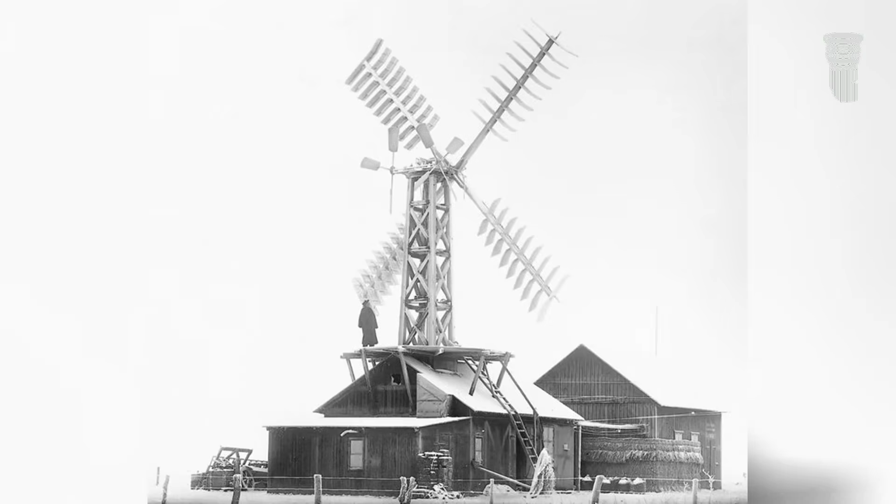Anyone with a water wheel or windmill could compress air and fill tanks themselves. This meant access to virtually free fuel, independence from supply chains, and the impossibility of creating an artificial shortage for profit. Such independence posed a direct threat to those who were building their financial empires on coal and oil at that time.

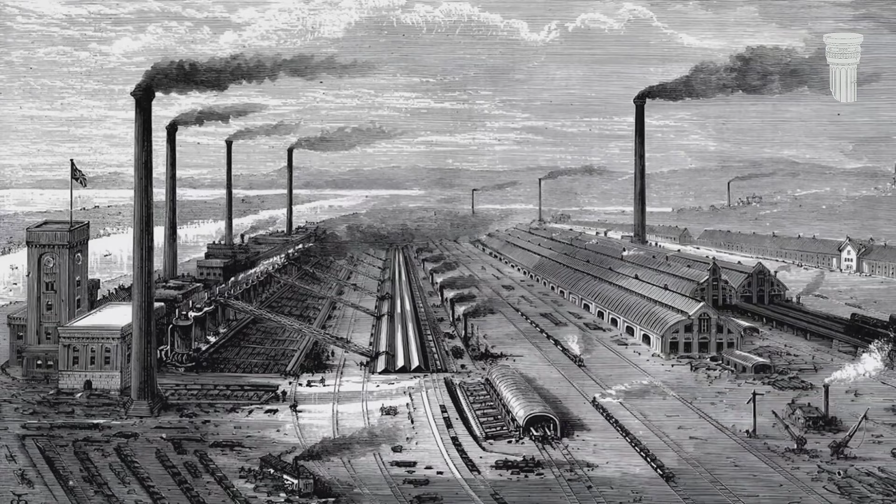The story of the pneumatic age, which almost came to be, is one of a technology that worked too well. In the 1870s, cities could have been cleaner than modern metropolises, yet there was a deliberate shift from energy freedom to dependence, which we were taught to call progress.

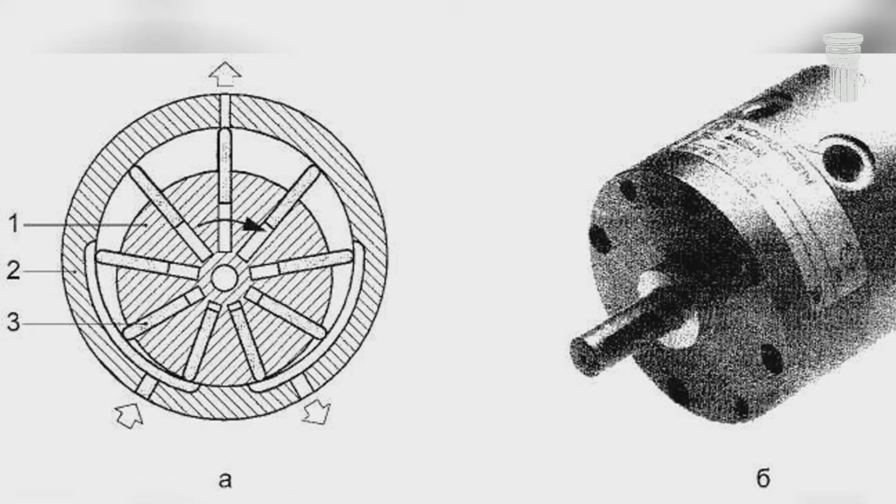Pneumatic trams were not a theoretical concept. They represented a fully functioning infrastructure. A key figure in this narrative was the Polish-French engineer Louis Mekarski, who secured his patent in 1876. His brilliance lay in solving a fundamental physical problem that had stumped all previous creators of pneumatic engines.

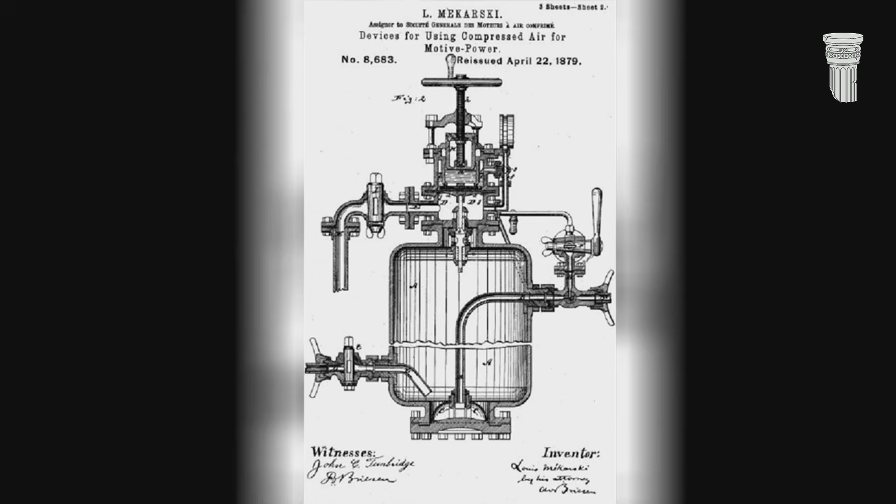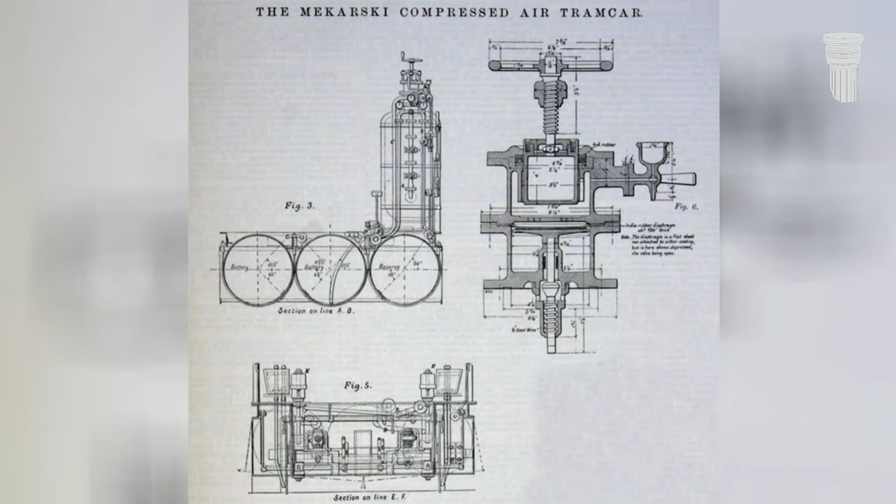This was the thermodynamic cooling effect during expansion. The laws of physics are unforgiving. When compressed air instantly transitions from a high-pressure zone to a low-pressure one, it expands rapidly, causing an extreme drop in temperature. In early models, this resulted in engines literally freezing from the inside. Valves would freeze, pistons would jam, and the machine would break down.

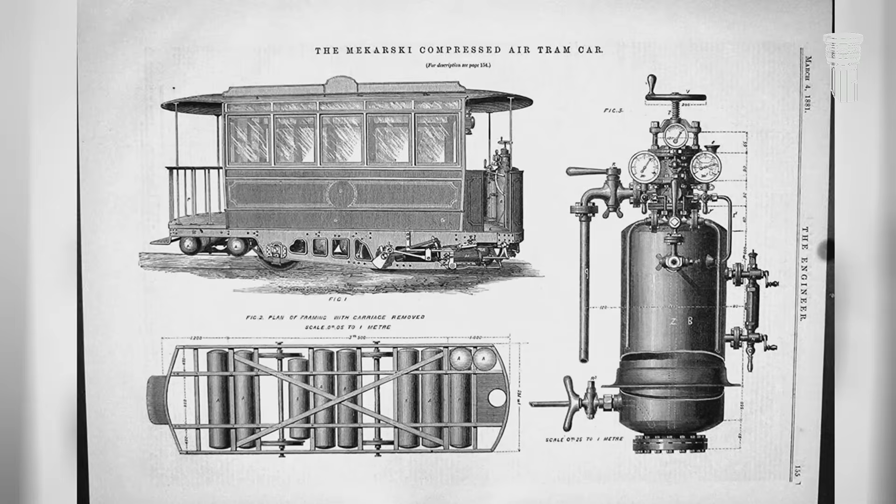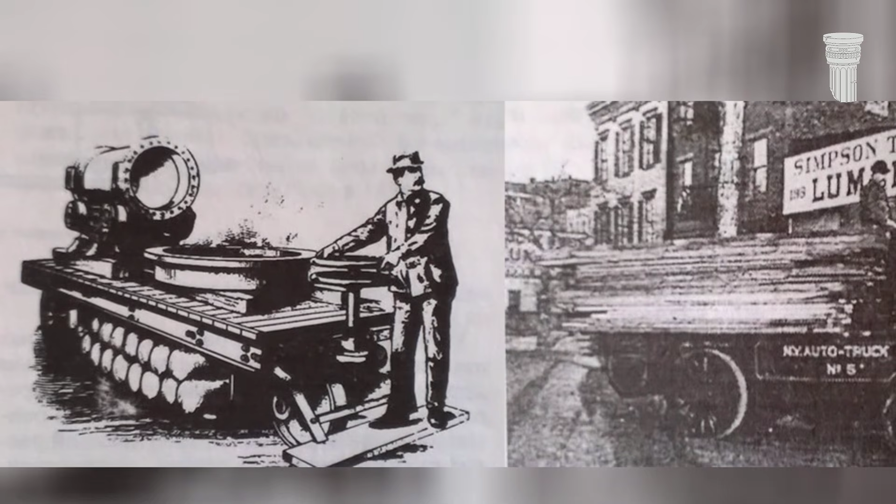Engines failed not due to a lack of power, but because the mechanisms couldn't withstand the icing. Mekarski found an elegant solution by introducing a system he called bouillotte, a built-in tank with heated water integrated into the air supply mechanism. In this system, compressed air from the tanks passed through hot water before entering the engine cylinders. The water transferred heat to the expanding air, preventing icing and maintaining stable pressure throughout the operational cycle. This was a technically perfect solution based on a profound understanding of thermodynamics.

The tanks on the trams stored air at a pressure of about 75 atmospheres, while the heating system kept the water temperature around 90 degrees Celsius. The oil costs for heating were negligible compared to the amount of coal consumed by the steam engines of that era. The results were impressive.

The vehicles could reach speeds of up to 30 kilometers per hour and had a range of 10 to 15 kilometers between refuels. Throughout the city, specialized compressor stations were set up where trams could quickly replenish their energy supplies. The capacity of the carriages rivaled that of horse-drawn carriages, but operational costs were significantly lower.

The Compagnie Générale des Omnibus successfully operated this pneumatic fleet for 41 years, daily transporting thousands of workers and tons of goods across numerous routes. Yet, in 1917, it all came to an end. The technology was scrapped and the infrastructure dismantled.

Officially, this was termed modernization and a transition to electricity. But it was during this period that oil began to seize global dominance, and the transportation system started transforming into a tool for global control.

Are you ready to discover how a similar technology secretly developed beneath the streets of New York and why its creator had to become a master of espionage to challenge a corrupt system?

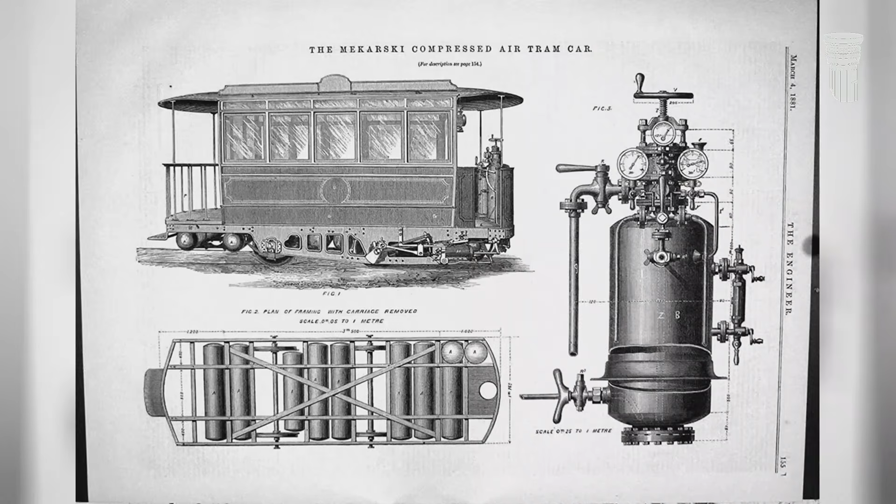Despite the success in Paris, the journey toward perfecting the pneumatic engine was obstructed by the harsh laws of nature. When Louis Mekarski, a French-Polish engineer, began his project in 1876, he encountered a challenge that had previously made the use of compressed air in transportation nearly impossible. It was a thermodynamic paradox.

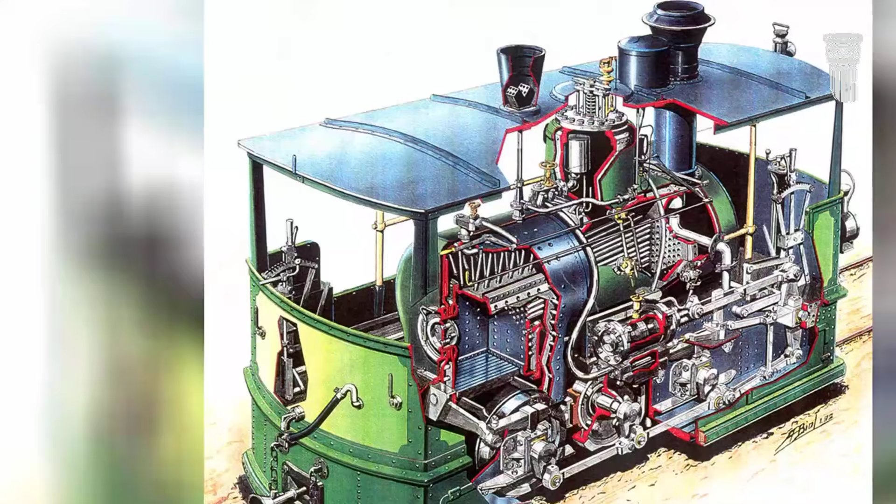Once air is released from a high-pressure zone into a low-pressure area to perform mechanical work, it expands rapidly, resulting in a sharp drop in temperature. This physical process turned the early pneumatic motors into genuine ice generators.

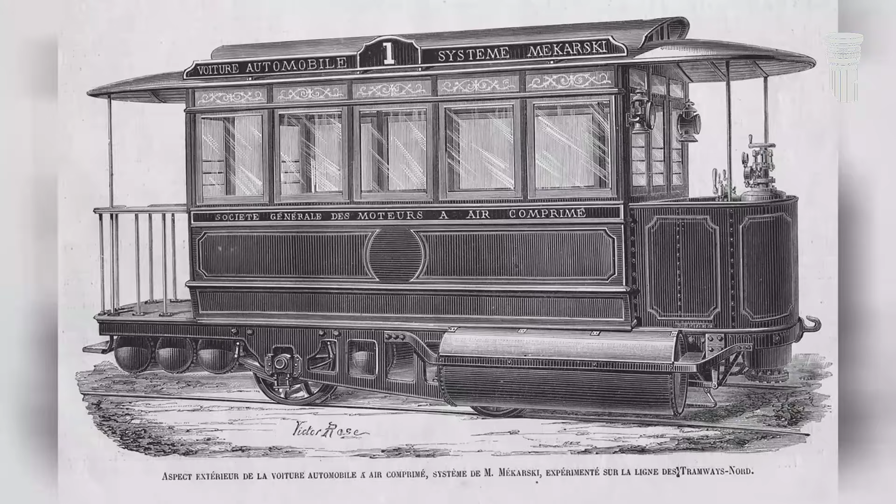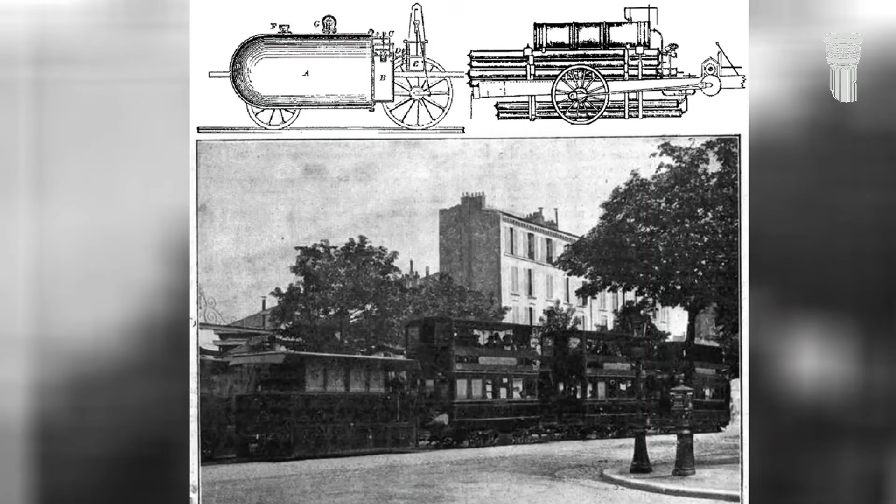Internal mechanisms would become covered in frost, valves would freeze solid, and pistons would jam in their cylinders. Engines failed not due to design flaws or lack of power, but because the metal couldn't withstand the Arctic cold generated within the system. For the technology to become commercially viable, the engineer needed to find a way to trick the physics of gas expansion.

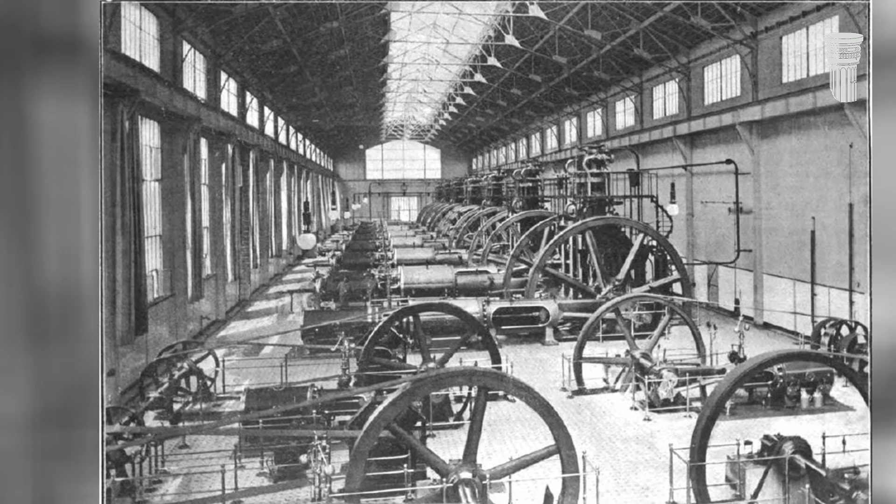Mekarski's solution was both simple and brilliant, known as the bouillotte system. He integrated a special tank filled with hot water through which compressed air passed before entering the engine cylinders. As it flowed through this thermal bath, the air became saturated with heat and water vapor.

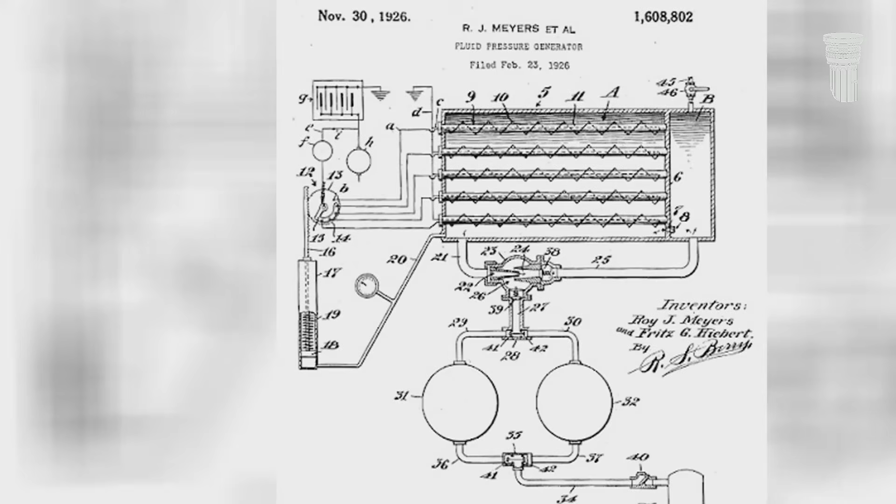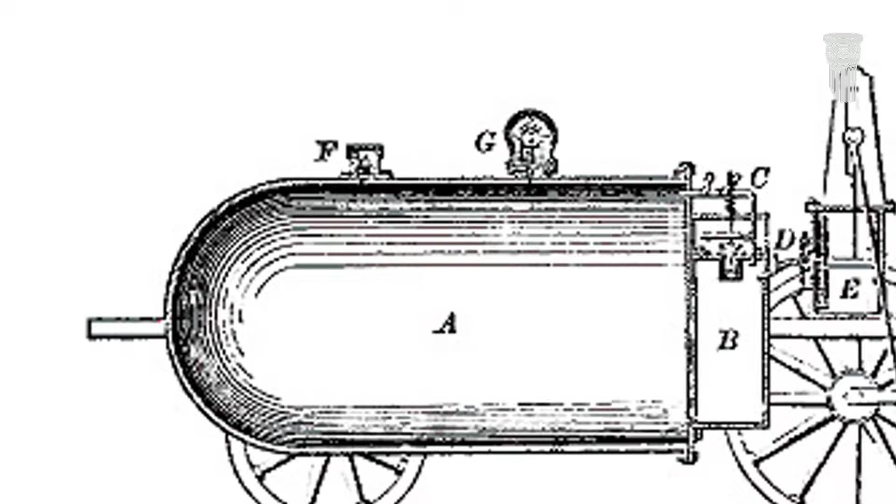This not only completely prevented the mechanisms from freezing, but also allowed for stable pressure and temperature throughout the entire working cycle. The technical drawings from that era demonstrate a profound understanding of thermodynamics.

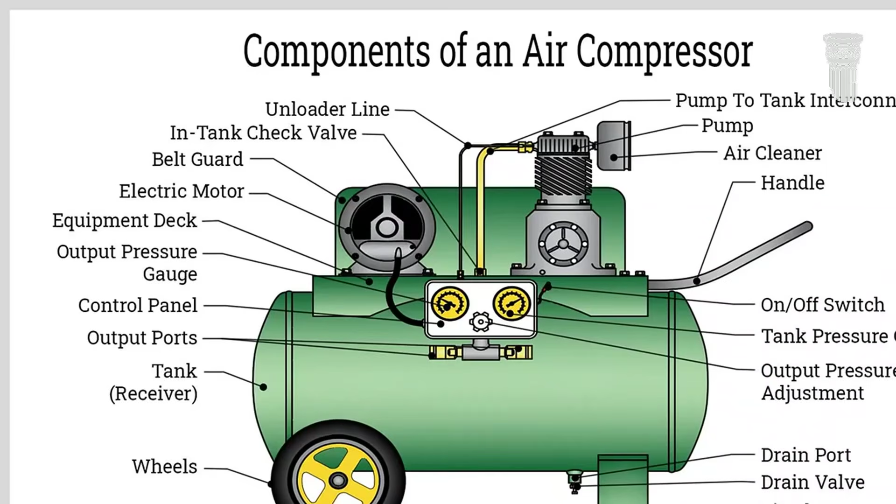Air was stored in tanks under a colossal pressure of 75 atmospheres, while the water in the heating system was maintained at 90 degrees Celsius. Remarkably, only a tiny oil heater was used to maintain this temperature, consuming a negligible amount of fuel compared to the voracious burners of traditional steam locomotives.

This made Mekarski's pneumatic trams incredibly autonomous and inexpensive to operate. Records from the Paris Transport Company confirm that these vehicles could easily reach speeds of up to 30 kilometers per hour and had a range of 15 kilometers between refuels at urban stations.

Passengers of that time experienced a level of comfort that seemed almost fantastical. No jolting, no smoke, and no noise, while the capacity of the cars matched that of horse-drawn carriages, but without the accompanying issues of waste on the streets. The system operated successfully for 41 years, becoming an integral part of Parisian life.

However, while European engineers were proving the reliability of pneumatics in everyday use, on the other side of the ocean, in New York, an even more thrilling and secret drama was unfolding, where compressed air became a weapon in the fight against political corruption. How was a marvel of engineering constructed under the busiest avenue of Manhattan, all under the strictest secrecy, destined to forever change the face of urban life?

In February 1870, the residents of New York were confronted with an engineering marvel that, by all logical standards of the time, simply shouldn't have existed. Right beneath the bustling Broadway, a subway line was unveiled, built under the strictest secrecy and powered by compressed air.

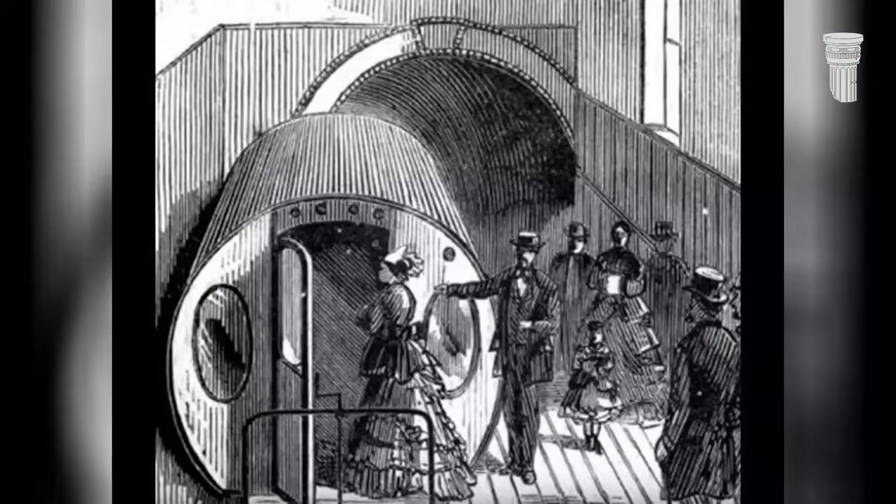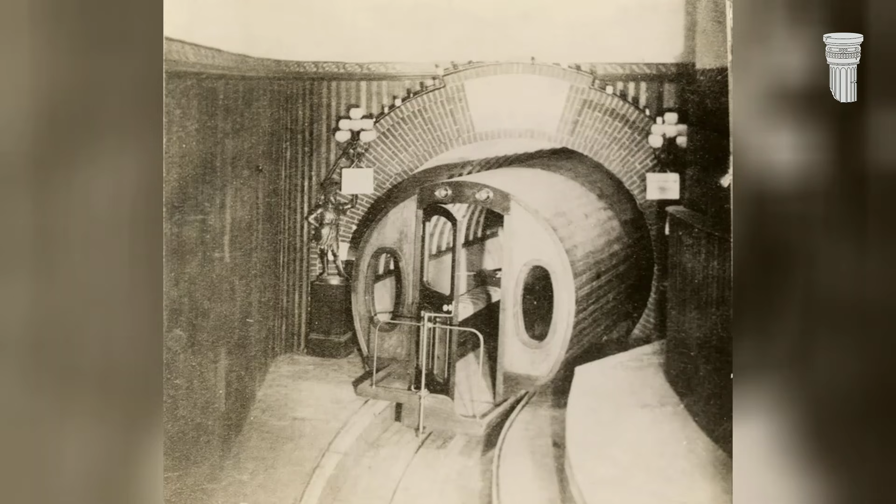The mastermind behind this ambitious project was Alfred Ely Beach, the publisher of Scientific American and a talented inventor whose story unfolded like a thrilling industrial espionage tale. Beach had proposed the concept of a pneumatic subway to the city officials back in the 1860s.

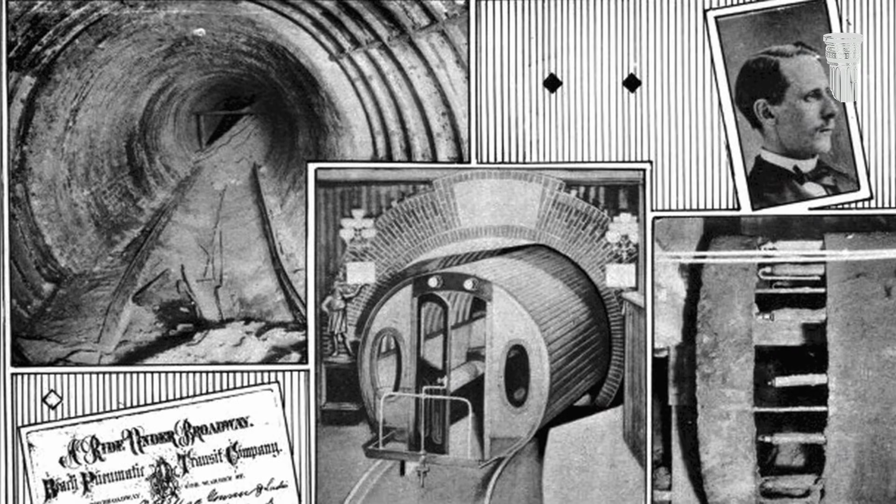The idea was technically flawless, a sealed tunnel housing a car propelled by a giant fan. The powerful airstream would literally push the vehicle along, much like a capsule in a pneumatic mail system. This setup promised to be fast, efficient, and didn't require engines on the car itself.

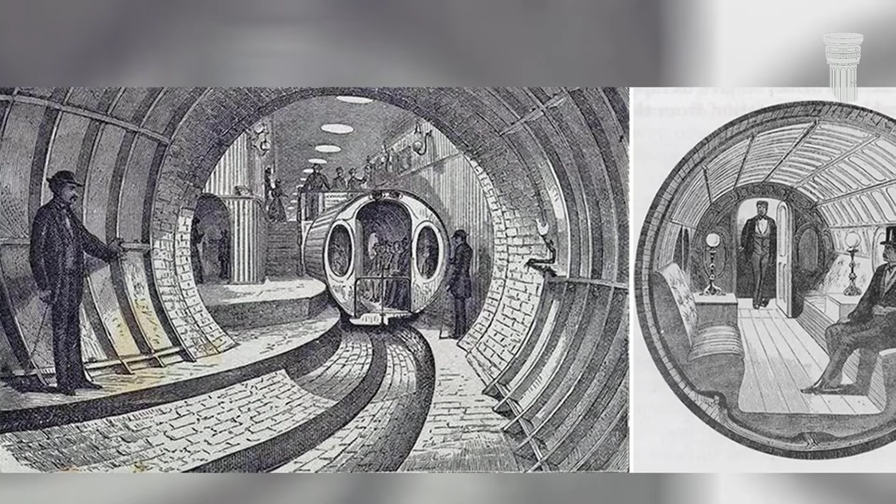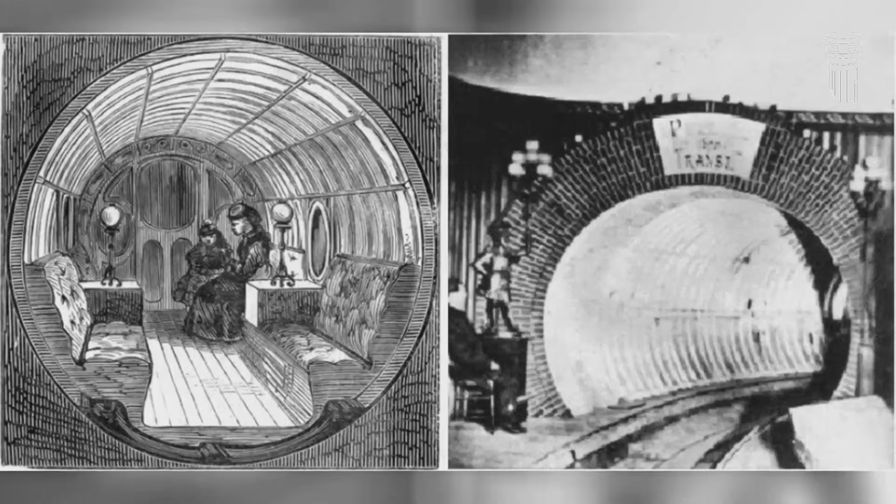However, progress was thwarted by political corruption in the form of William Marcy Tweed, known as Boss Tweed, who had complete control over the politics and transportation system of New York at the time. With significant financial interests in surface streetcar companies, Tweed blocked any attempts to create an underground transport system that could rival his business.

Realizing that obtaining permission to build the subway was impossible, Beach took an unprecedented risk. He officially requested a license to lay a small pneumatic tube for transporting mail, which didn't seem to threaten the transportation magnates. Once he secured the necessary papers, he and his team began secretive work.

Under the cover of darkness, workers manually excavated a tunnel about 3 meters in diameter and over 95 meters long, right beneath one of Manhattan's busiest avenues, illuminated only by lamplight. To avoid suspicion, tons of excavated soil were discreetly removed through the basement of an ordinary clothing store.

The result of this underground endeavor was astounding. The brick lining of the tunnel was executed with such precision that the buildings above sustained no damage whatsoever.

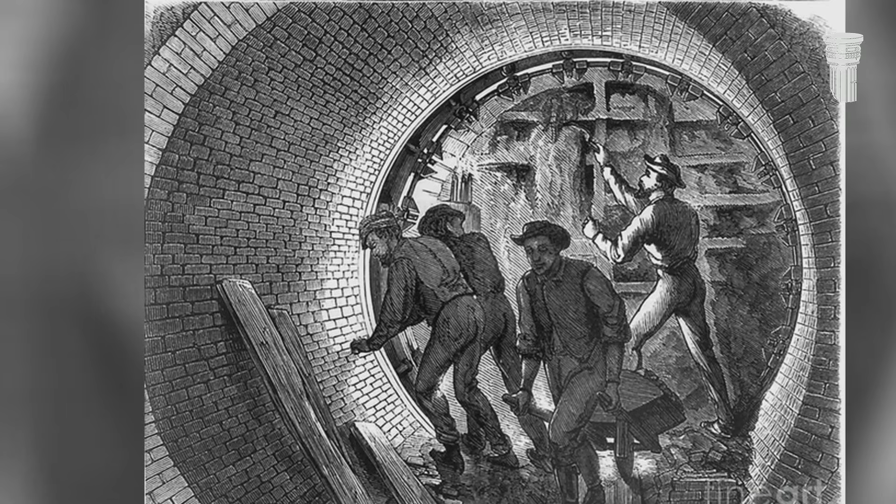At the heart of the system was a massive 50-ton fan, capable of generating enough airflow to move a 3-ton car at a speed of 16 kilometers per hour. The car itself, designed for 22 passengers, was a vision of comfort and luxury, featuring plush seats, gas lighting, and elegant windows.

When Beach finally opened the subway to the public, the reaction was ecstatic. The waiting station resembled a lavish salon more than a transport hub, walls adorned with murals, a grand piano in the room, a fountain, and even an aquarium.

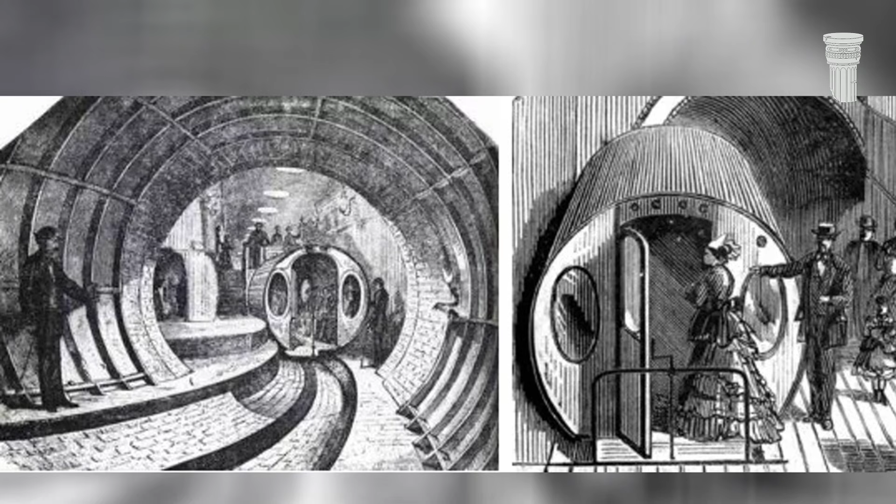This was not a crude experiment. It was a showcase of what the future of urban transport could look like. Thousands of people rode the pneumatic train, and the press dubbed the project the Subway of the Future.

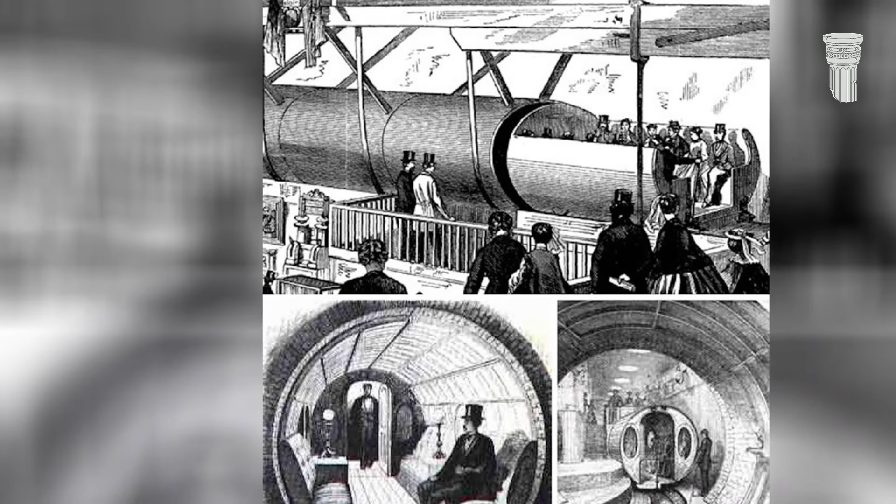Beach was poised to expand the network throughout Manhattan and had already found investors for his $5 million plan. But this engineering triumph faced the harsh reality of political influence, which turned this success into a forgotten chapter of history.

How did New York's political machine manage to dismantle a project that had already proven its viability? And why did the citizens have to pay the price of decades of waiting for this victory of private interests? Do you want to continue and discover how Boss Tweed put an end to the pristine future of the metropolis?

Alfred Beach's triumph was short-lived, as he encountered a force that could not be defeated by engineering calculations alone. In late 19th century New York, real power belonged not to the law, but to the political machine known as Tammany Hall, led by William Tweed. For Tweed, the boss, and his associates, any public project was viewed solely as a means for personal enrichment.

Beach's pneumatic subway was too transparent, too autonomous, and, most importantly, it did not allow Tweed to control the financial flows he had already distributed among his allies in surface transportation. Using his colossal influence, Tweed managed to convince the state governor to veto Beach's bill for expanding the underground network. The official reason cited was concern for the safety of building foundations, but in reality, it was a political execution of a promising technology. When Tweed himself found himself at the center of a corruption scandal and lost power, Beach's project was not given a second chance.

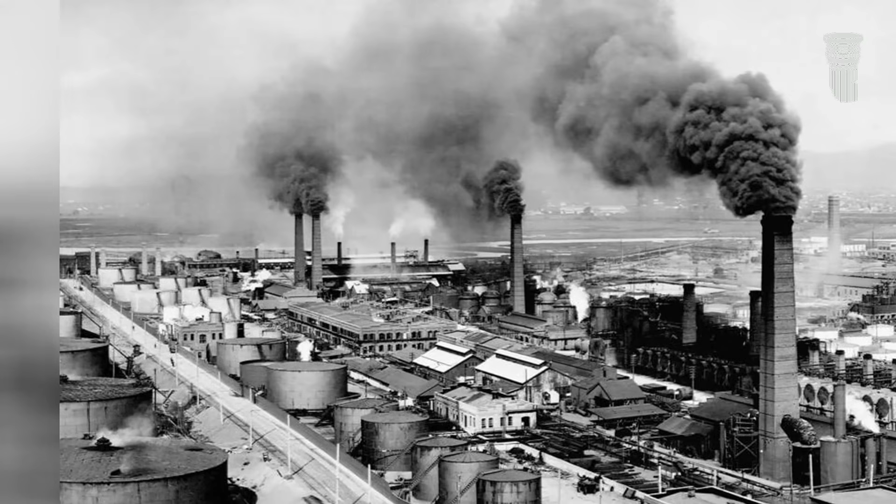However, beneath the local political intrigues of New York lay a more significant process at play. The end of the 19th century and the beginning of the 20th marked an era of forming global energy monopolies. John Rockefeller and other oil magnates were building an empire where every mile traveled had to be paid for by purchasing fossil fuels. Compressed air, which could be obtained almost for free through the power of wind or falling water, posed an existential threat to this model.

This is why the year 1917 became a symbolic date, marking the definitive decline of pneumatic transport in major cities. While the world was consumed by global conflicts, a quiet modernization occurred. Eco-friendly and durable systems were replaced with those that required constant fuel purchases or complex centralized electricity generation. Pneumatics did not lose in efficiency. It lost in its ability to generate enormous profits for a select few.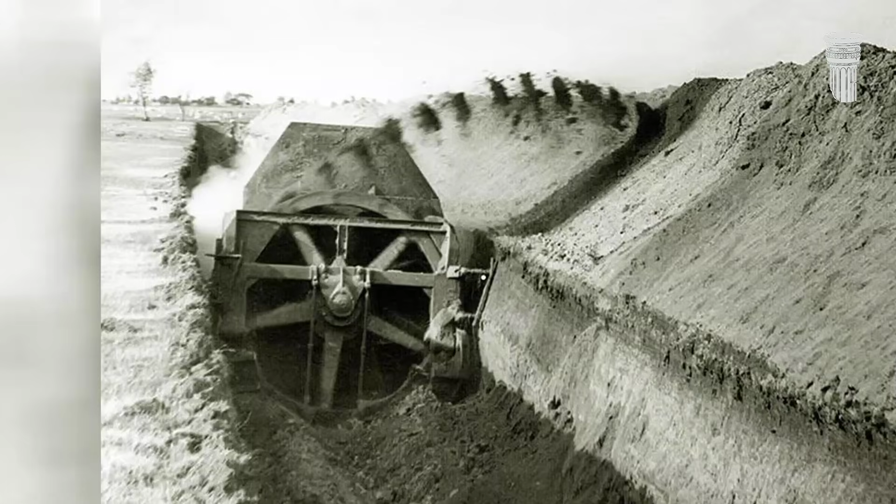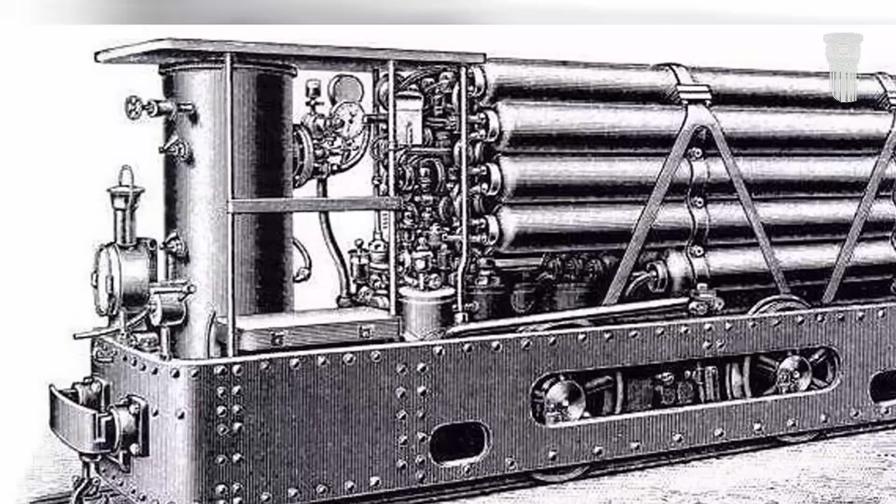Yet, even as cities officially turned away from air in favor of gasoline, this technology did not vanish entirely. It retreated to places where the use of internal combustion engines was perilous, and reliability was valued above marketing slogans. Pneumatics found its last refuge deep underground and in secret communication systems, becoming the invisible backbone of the industrial world. How did compressed air continue to serve humanity in the complete darkness of mines, and how did entire metropolises operate for decades through a physical internet hidden within pipes?

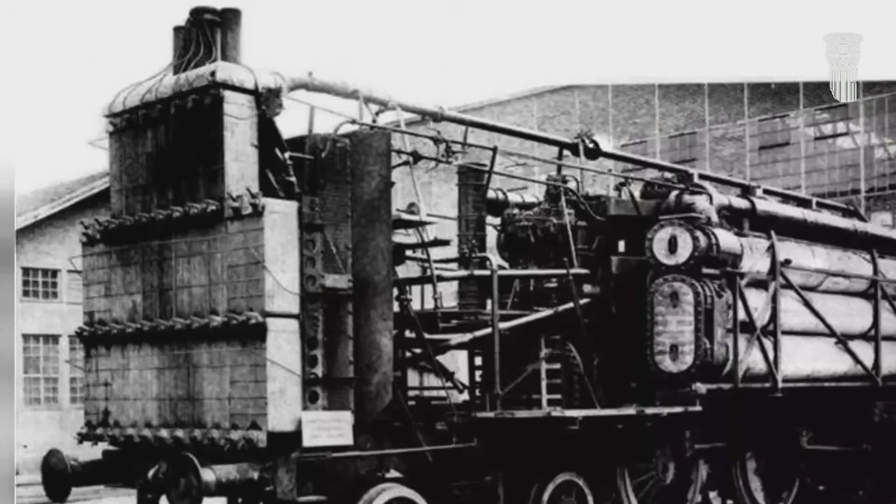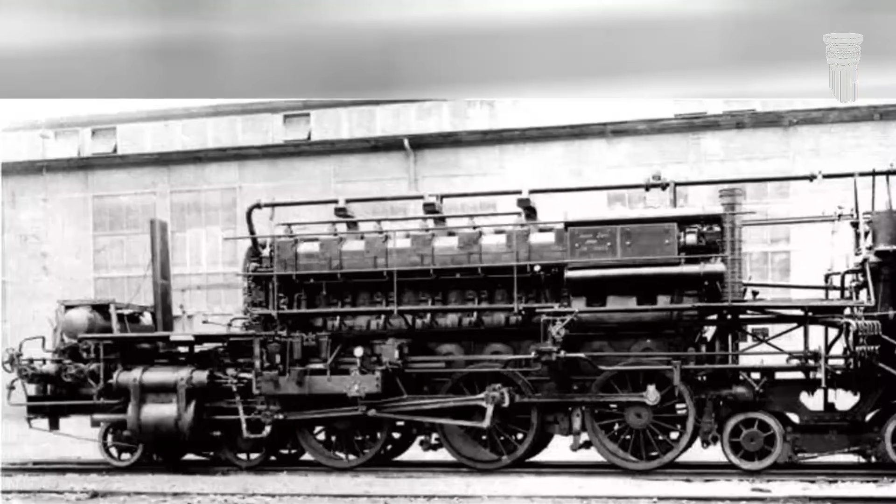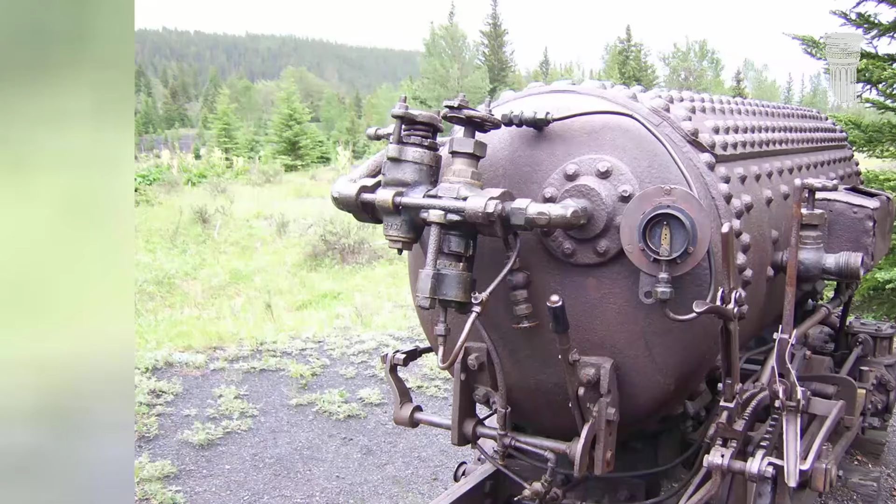When ground transportation was ultimately taken over by oil corporations, compressed air found refuge in the harshest conditions, where human survival literally depended on the purity of energy. Mines and deep tunnels became the last bastions of pneumatics. In the confined spaces of the underground, the use of steam engines was impossible due to suffocating smoke, while early internal combustion engines posed a deadly explosion risk from the slightest spark igniting mining gas.

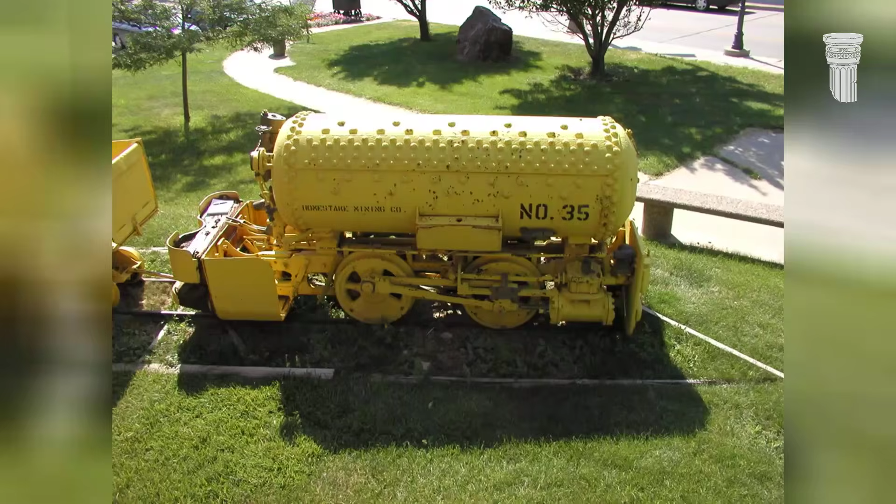In this environment, pneumatic locomotives proved to be the ideal workers. They not only consumed no oxygen, but in fact expelled fresh, cool air with every engine cycle, improving ventilation for the workers. These powerful machines could pull trains weighing up to 100 tons, operating in complete darkness and dampness for decades. In some European and American mines, such systems remained the primary mode of transport until the mid-1950s, demonstrating that in extreme conditions, reliability and safety outweigh marketing advantages.

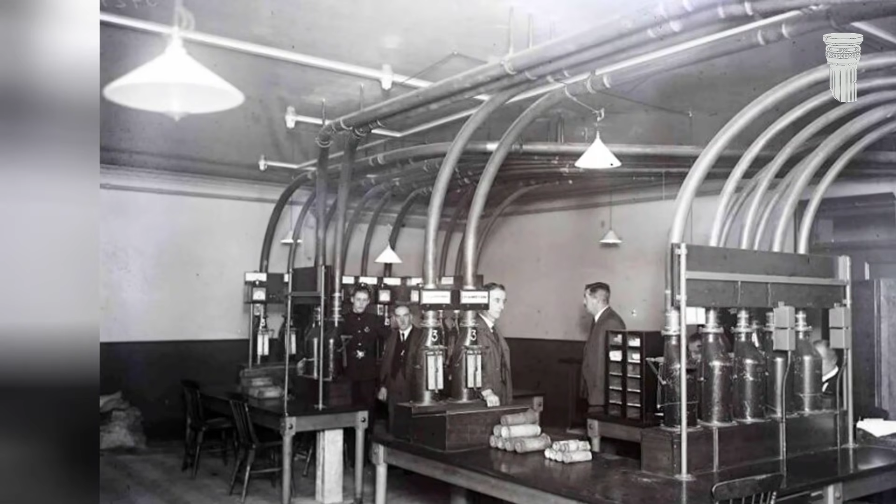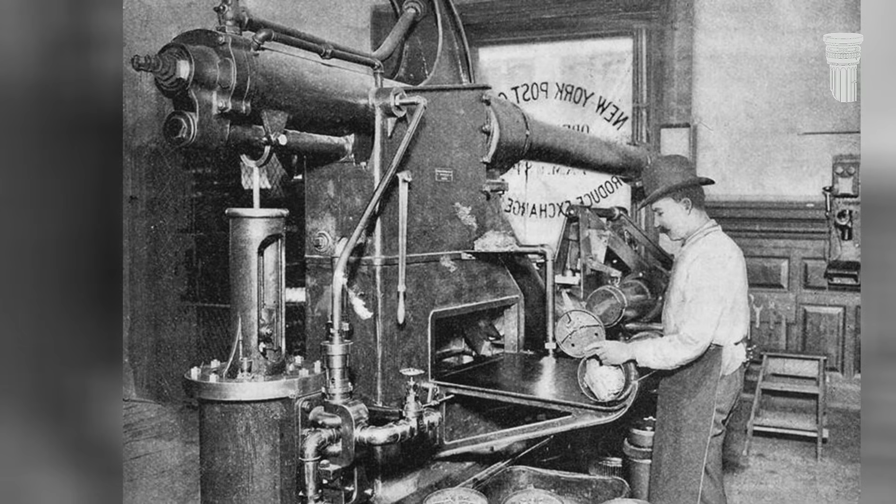However, the most monumental testament to this technology was the pneumatic network of Paris. While engines roared above ground, a true physical internet sprawled beneath the streets of the French capital. By the 1930s, the length of this piping system reached a staggering 400 kilometers. It was a complex infrastructure that connected post offices, government buildings, and banks. Capsules carrying documents and letters moved through the city at a speed that seems incredible today. Correspondence could cross the metropolis in mere minutes, oblivious to traffic jams or weather conditions.

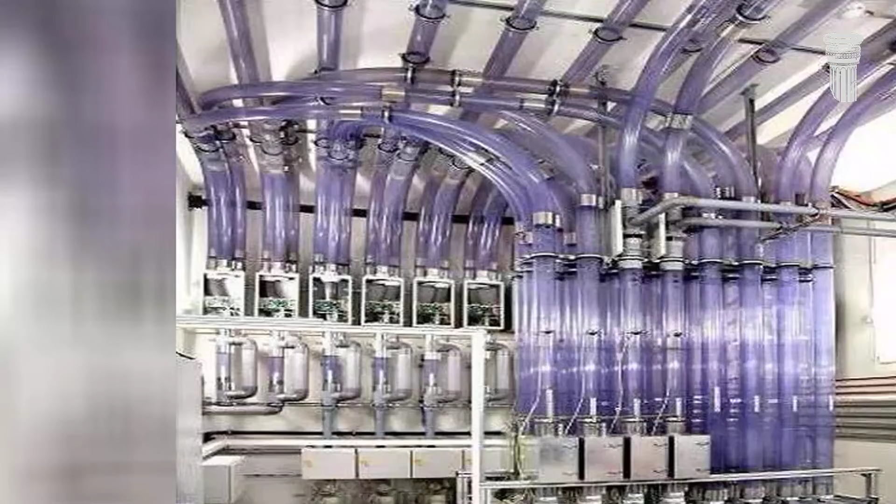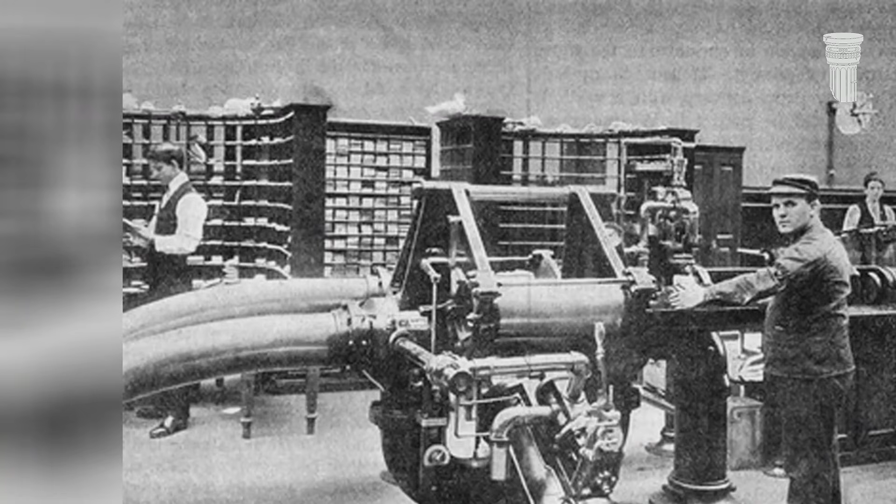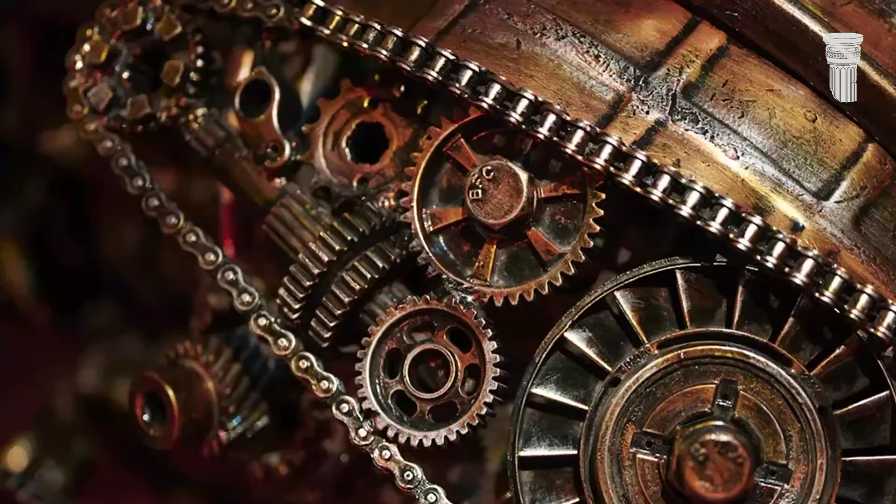The Paris pneumatic postal system was so efficient that it remained in operation until 1984. For over a century, the city relied on pressurized energy that worked silently and unobtrusively. This network was a prototype of instant communication, realized in metal and air. But Paris was not alone. Similar systems operated in London, Berlin, New York, and Prague. It was a living demonstration of how pneumatics could sustain the vitality of an entire metropolis for a century without a single gram of fossil fuel directly in consumer engines.

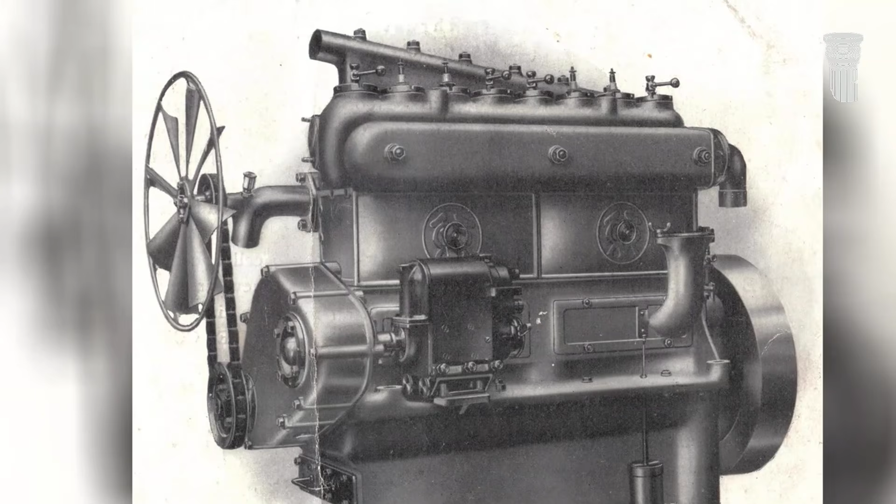But if the technology was so durable, lasting over 100 years without a fundamental change in concept, why do we not see its continuation today? The answer lies in the conflict between engineering excellence and the economic model of consumption. How did the world choose the path of mechanisms intentionally designed to fail, and why did durability become the main enemy of profit?

This will be explored in the next part of our investigation. Next, we will delve into how the strategy of planned obsolescence and Rockefeller's economic mathematics displaced transportation capable of serving generations.

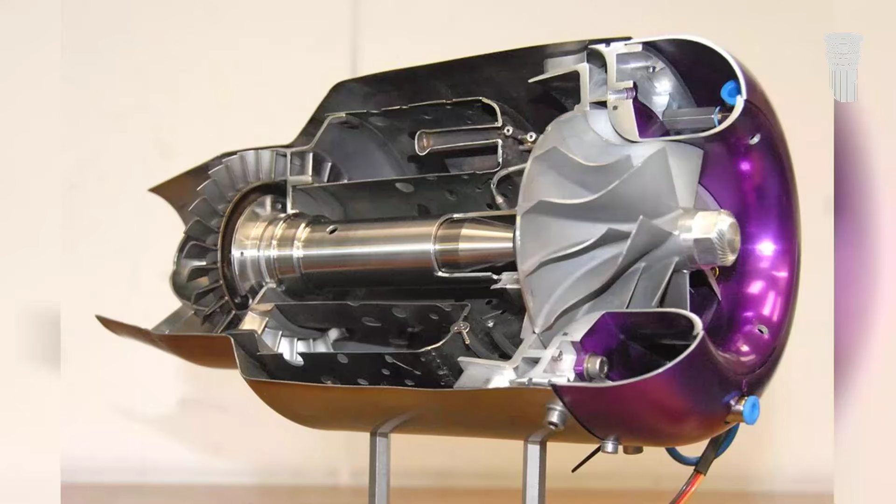The main reason pneumatic transport has not survived to this day lies in a fundamental conflict between engineering quality and economic benefit. Pneumatic engines had a characteristic that seems unimaginable for manufacturers today.

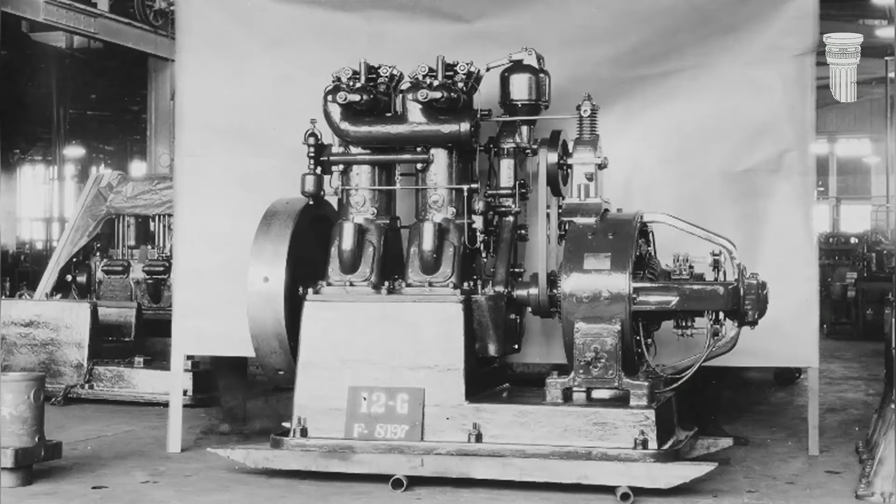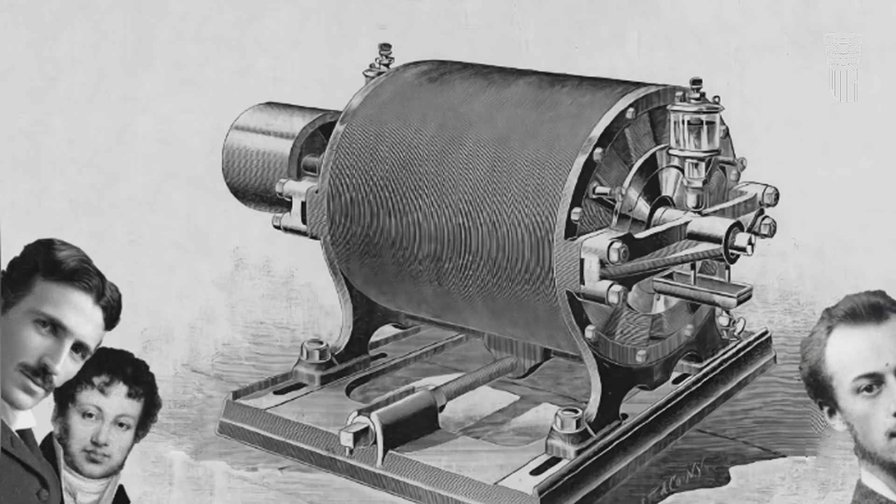They were virtually eternal. Unlike internal combustion engines, where thousands of micro-explosions destroy metal every minute, causing friction, soot, and overheating, a pneumatic piston operates in a cold and clean environment. The wear and tear on components in such a system is minimal.

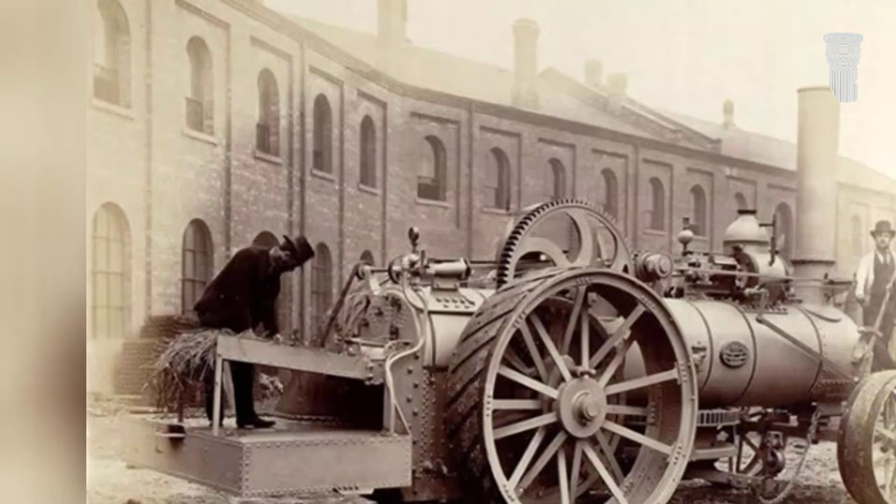Archives contain data on locomotives that served for 50 years without major repairs, requiring only regular lubrication.

For the burgeoning industrial economy of the early 20th century, such durability was a sentence. If you sell a machine that lasts half a century, your market saturates too quickly.

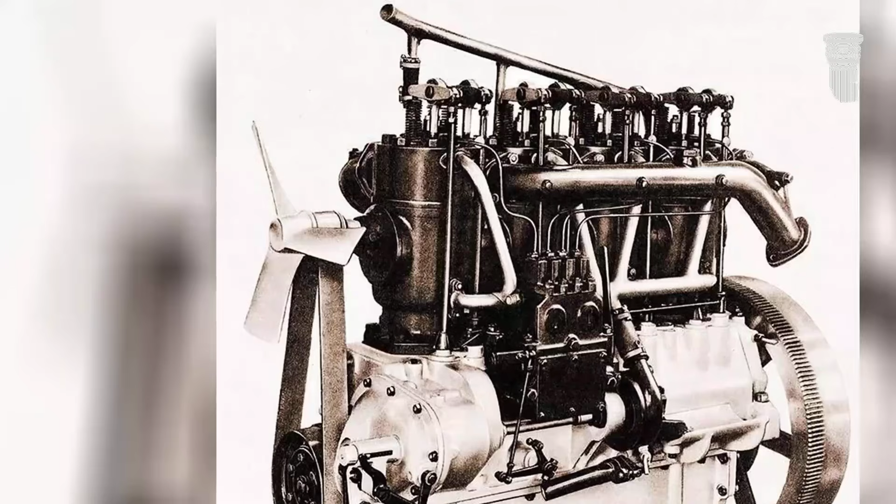It was during this time that the concept of planned obsolescence began to take shape. The business model crafted by oil magnates like Rockefeller involved not just selling a vehicle, but creating an endless cycle of consumption.

Internal combustion engines fit perfectly into this scheme. They are complex, require frequent servicing, the replacement of numerous consumables, and most importantly, tie the owner to the fuel pump.

The myth of energy density, often used to discredit compressed air, was a convenient tool for lobbyists. It was claimed that air takes up too much space and provides too little energy.

However, in practice, Paris trams and mining haul trucks proved the opposite. For urban needs and heavy freight transport, this power was more than sufficient.

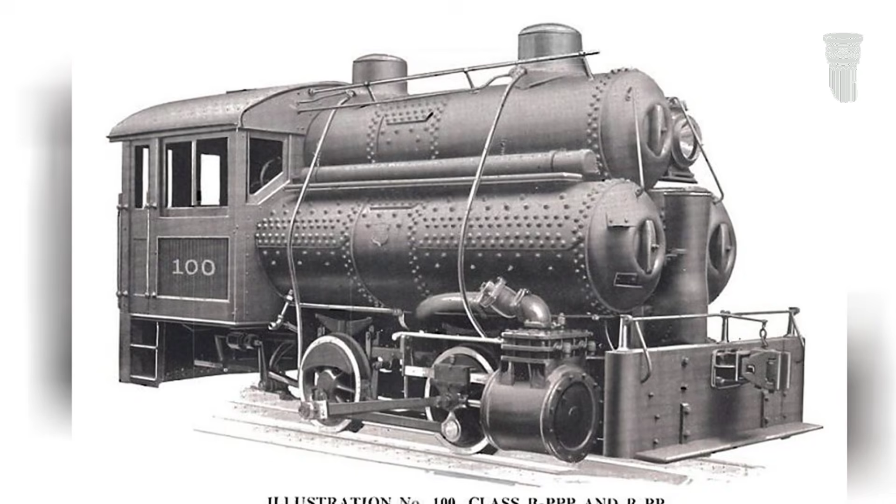The real issue lay in decentralization. Compressed air is a democratic energy source. It cannot be cut off by a valve on the other side of the continent or burdened with exorbitant extraction taxes if you have access to any source of mechanical power.

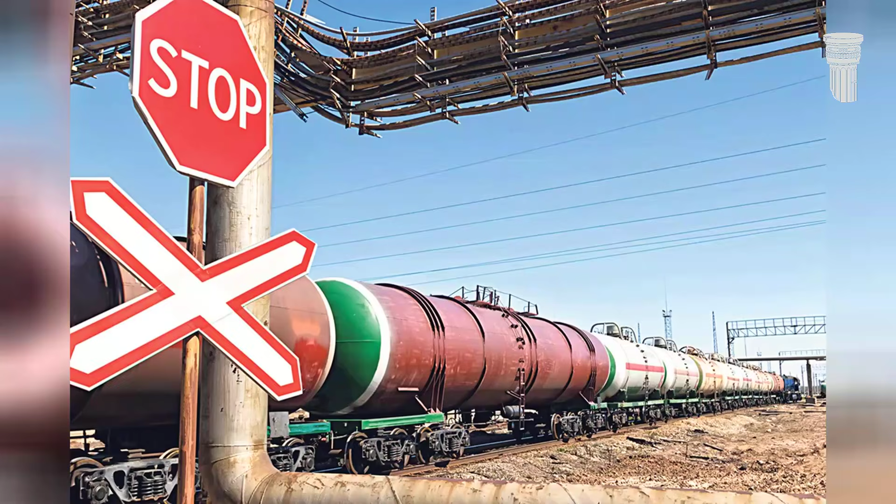As a result, the world underwent a great substitution. We traded independence and tranquility for speed and complexity. Regression was neatly packaged in the guise of progress.

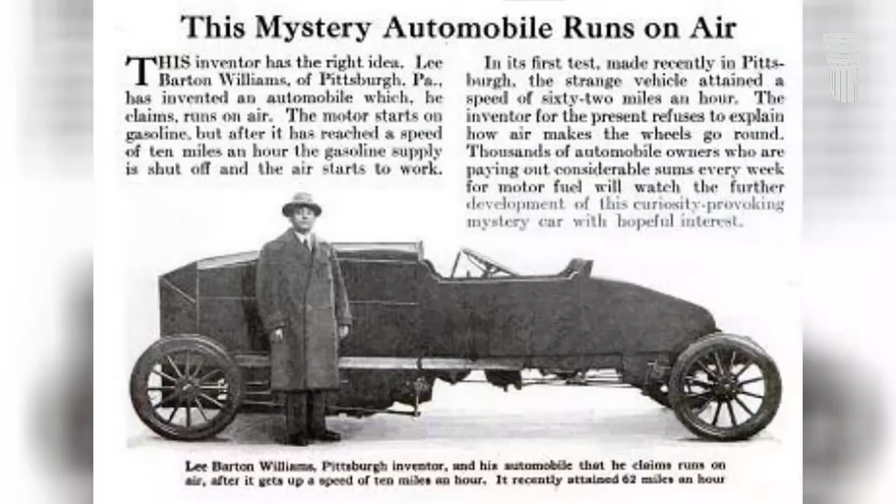Instead of improving air storage systems, investments were directed towards complicating gasoline systems. By the mid-20th century, the very memory of the possibility of an alternative path was nearly erased from the textbooks of history and engineering.

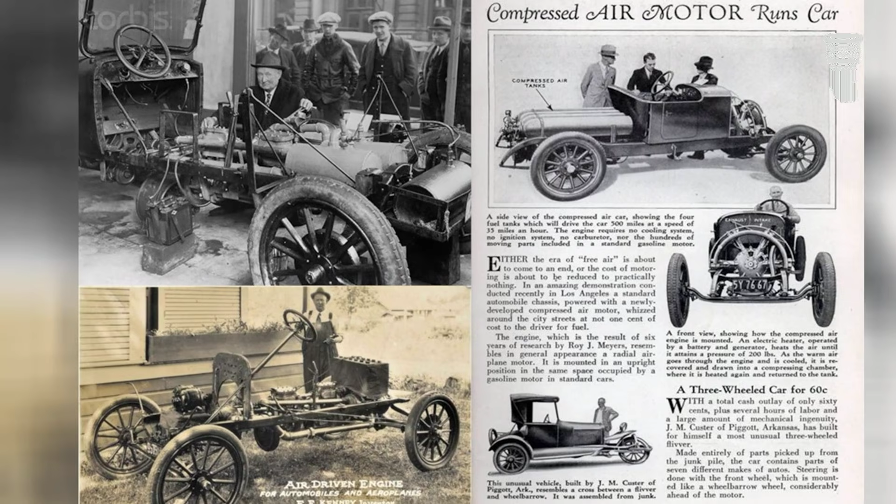Most astonishingly, decades before this conclusion, one of humanity's most visionary minds had already foreseen this scenario. His manuscript, predicting the triumph and subsequent oblivion of a pneumatic future, was deliberately hidden from the public eye, like a dangerous prophecy that was not meant to come true.

What future for our cities did Jules Verne foresee back in 1863, and why was his vision considered too dangerous for publishers of that time?

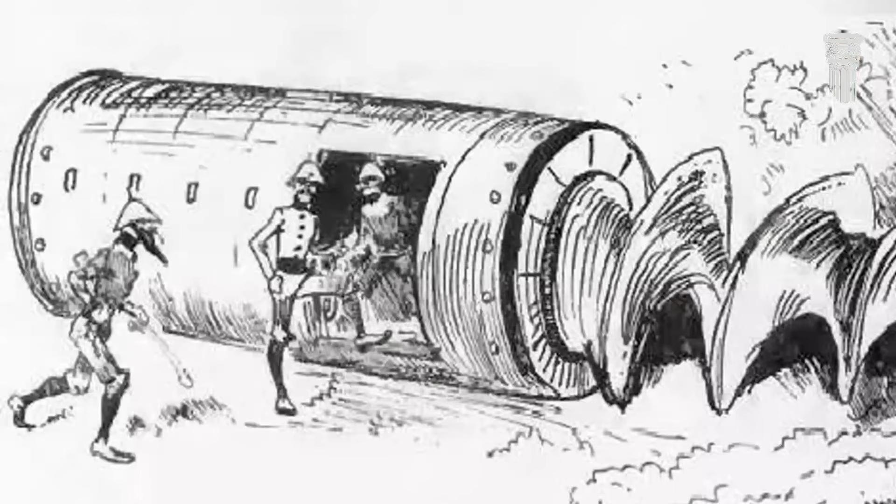Few people know that long before oil giants began dictating terms to the world, the greatest visionary of the 19th century, Jules Verne, had already outlined a future we lost. In 1863, he completed his novel Paris in the 20th Century, where he predicted a world reminiscent of the 1960s.

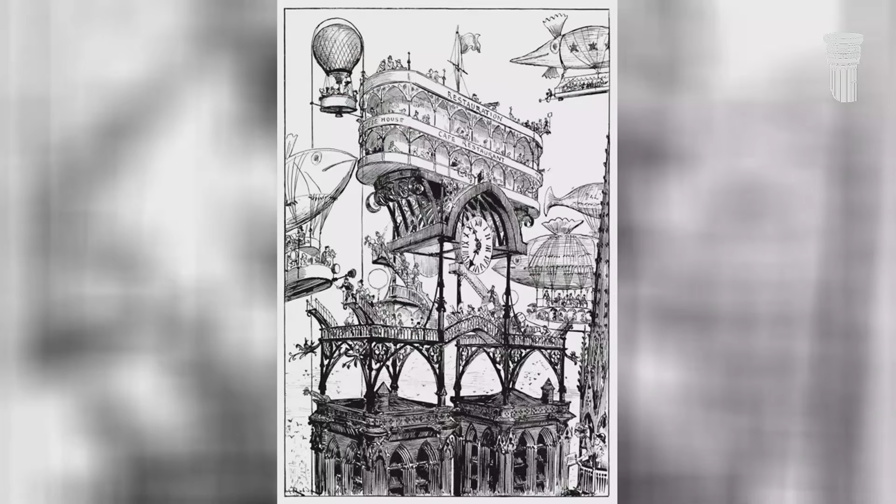His vision was astonishing, a city woven with a network of silent trains powered by compressed air. It was a clean, high-tech metropolis where transportation didn't poison the lives of its inhabitants.

However, Verne's publisher, Pierre-Jules Hetzel, rejected the manuscript, deeming it too implausible and grim. The book was only discovered in 1989, locked away in a safe belonging to the author's great-grandson, standing as a

mute testament that a pneumatic future was not a utopia. It was a plan deemed inconvenient.

The tragedy of this story lies in our tendency to measure progress solely by complexity and power, forgetting the original purpose of technology, to serve humanity without destroying its environment.

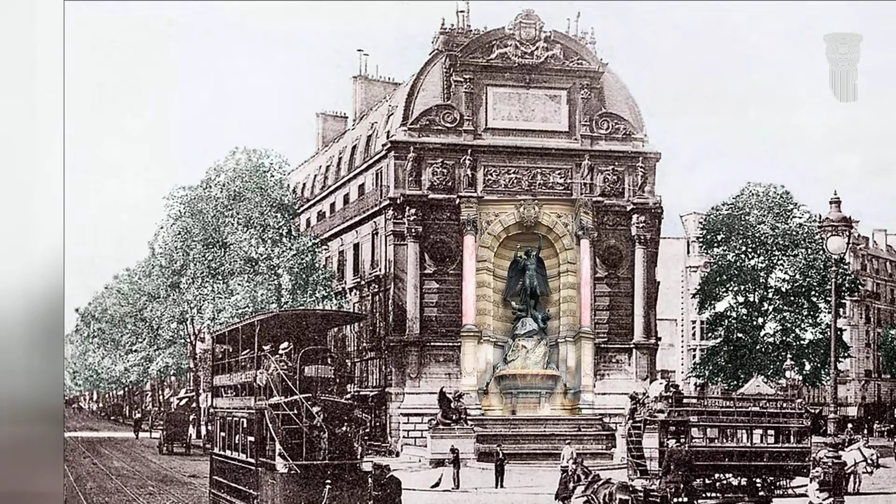Paris in the 1870s, with its silent trams and efficient pneumatic mail, was in some ways more advanced than modern metropolises choking on traffic and smog.

Back then, engineers designed systems capable of operating for decades, relying on the inexhaustible resources of nature rather than global fuel supply chains. The pneumatic age didn't end in failure, it was artificially interrupted.

The choice for gasoline and coal wasn't based on technical superiority. It was a choice for control over independence. We traded the silence of our streets for the roar of engines, and energy freedom for geopolitical conflicts over resources.

The history of coal and oil-free trains proves that humanity had a chance to pursue a path of harmony with physics and ecology, and that chance wasn't lost due to a lack of knowledge. It was sold for profit.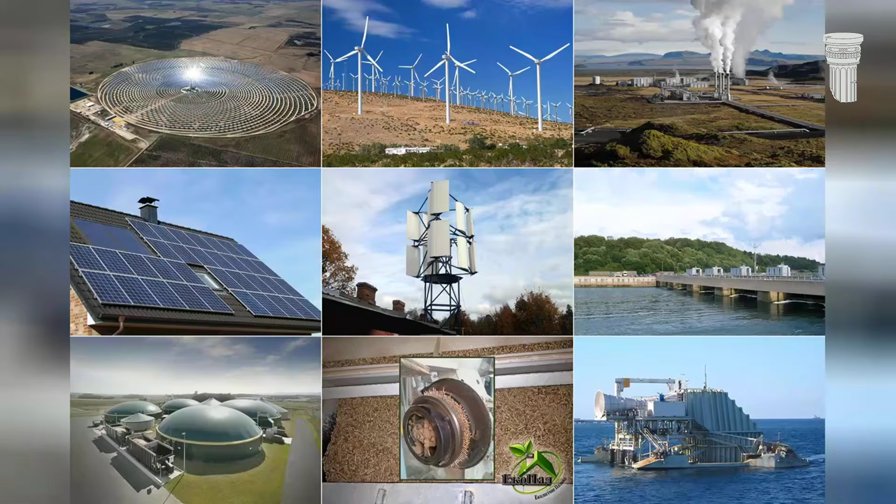Sometimes it's about returning to the elegant and clean solutions we held in our hands a century and a half ago. The question is, are we ready today to choose the independence that was once deemed too dangerous for the market economy? After all, air, unlike oil, still belongs to everyone.